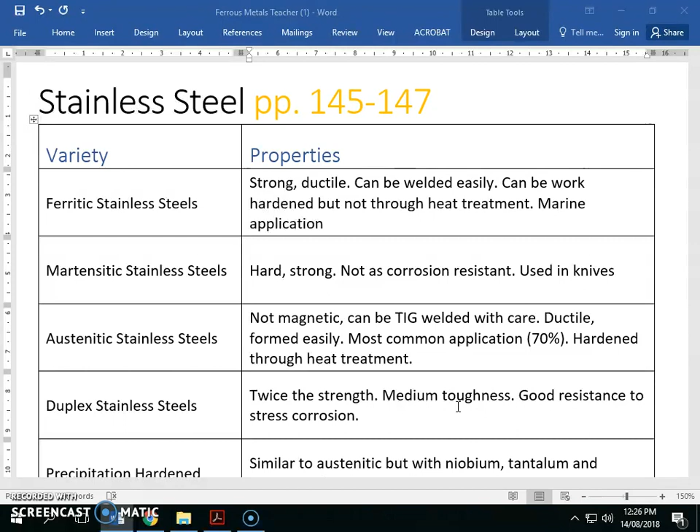These have martensite. We didn't talk about martensite above, but when we quench steel, we get acicular or needle-like grains. When we rapidly cool austenite, what we get is something called martensite. If you have to draw martensite, just draw a whole bunch of sticks. If you want to label it, you can say acicular, which means needle-like. What happens is it goes from being face-centered cubic to body-centered tetragonal. Now, the likelihood of needing to know that in the HSC is pretty low, but I'm going to put it out there anyway.

So we're going back to when we have martensite, martensitic stainless steel. It's hard, it's strong, it's not as corrosion resistant, but it's used in knives.

Austenitic stainless steels are not as magnetic, and can be TIG welded, but with care. Because otherwise, if it cools too rapidly, there's enough carbon in it for it to form martensite, and we don't like martensite unless we're going to temper it. It's ductile and formed easily, so it can be used in things like fridges. It's the most common application - 70% of all stainless steels are austenitic. They can be hardened through heat treatment, but I don't think they can be work hardened very well.

Duplex stainless steels have twice the strength. They have medium toughness, so they're between ferritic and austenitic, I think. Good resistance to stress corrosion is their big advantage.

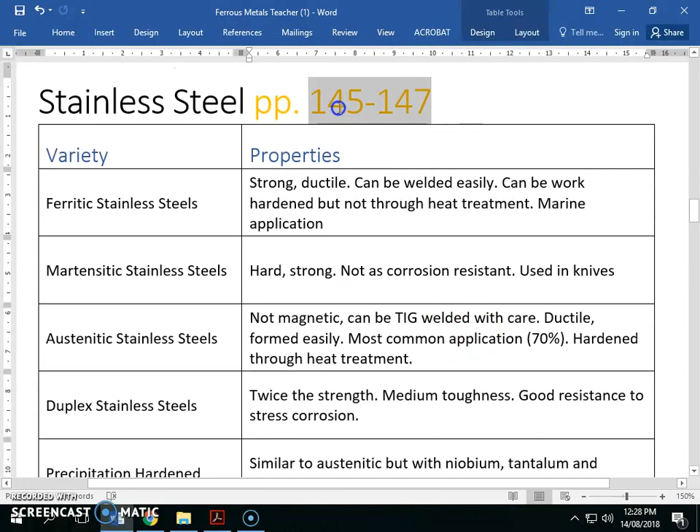All of these things you can find in the table in the 4th chapter of the book. I've jumped a chapter because I want to talk about all of the ferrous metals at the same time.

Precipitation hardening - some stainless steels can be precipitation hardened. This is a bit of a funny concept. Some aluminiums can also be hardened through precipitation hardening.

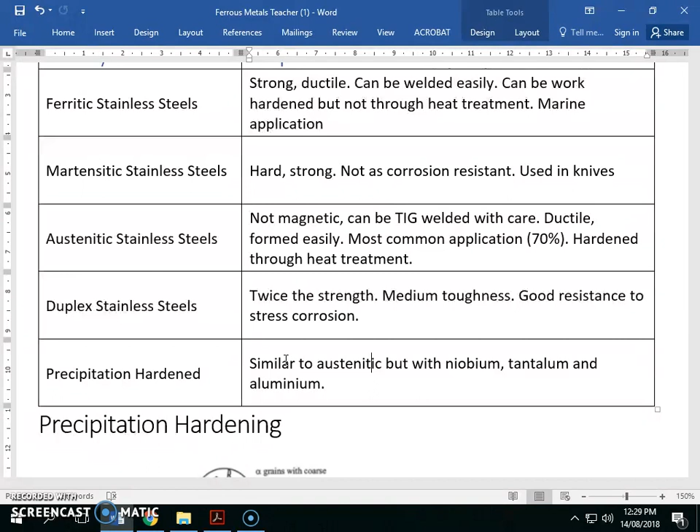I did not understand this concept until I started teaching it, and a friend of mine who used to live in Slovenia, who did his PhD in metallurgy, explained it to me. I said, where does the carbon come from? He said, well, do you know what case hardening is? It's the same thing, except the carbon is already inside the metal. It's already distributed through the whole thing - it's not being pushed in from the outside.

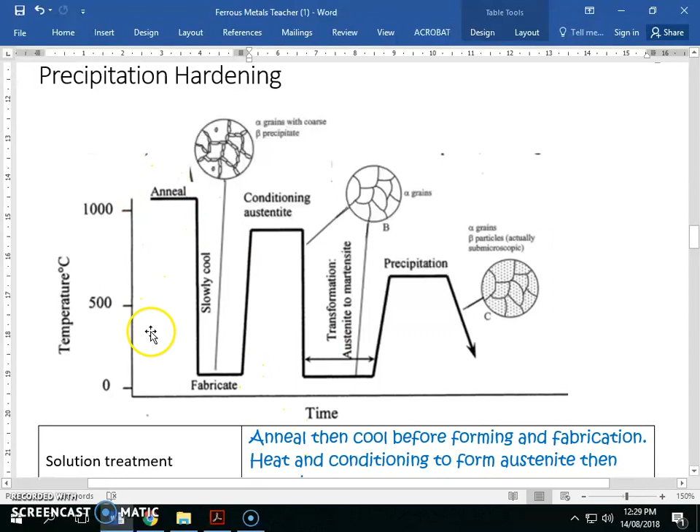Let's have a look at this graph here. Now you're going to complete some stuff. The first step you have to do is the solutions treatment. So the solution treatment is this part here and then there - that's the first step. Actually, the first step is these first two bumps, right there and there.

That's the solution treatment. First of all, you have to anneal. Then you cool before you form - that's fabrication, the forming. You're going to heat and condition to form austenite - you're going to form 100% austenite, and then you're going to quench.

What you're going to produce is two grains. Along the grain boundaries, and sometimes between grains, you're going to have a second different phase of material. It depends on what kind of material you're using, but this is pretty true of all precipitation hardening. I've combined this image using the aluminium one, but the idea is we're going to have different grain structures forming along the grains.

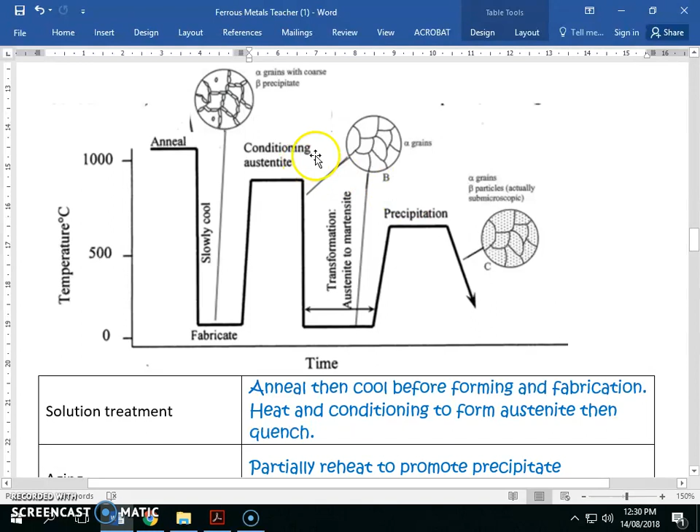That's not good. What we want to do is dissolve these little grains and integrate them evenly throughout the entire network, the entire grain. How I like to think of it is the second half of this process is that we are going to age - we're going to partially reheat, not to the same temperature. What we're going to do is allow precipitates to form evenly throughout the entire grain, and that strengthens the alloy.

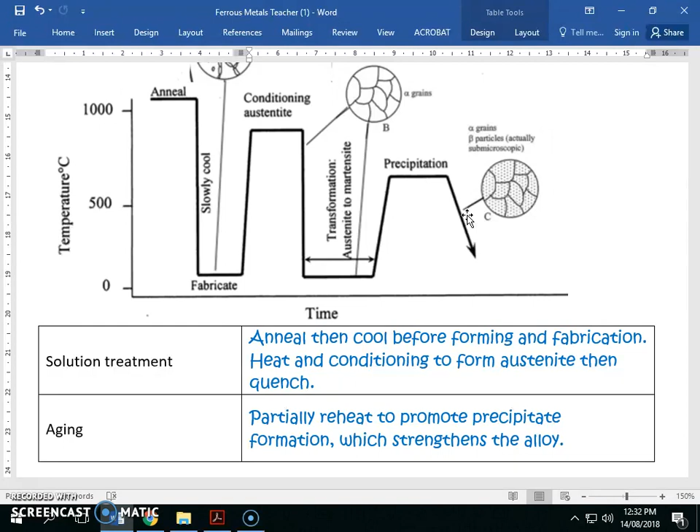The reason why that happens is we have these microscopic, or submicroscopic, precipitates. When we want to try and deform these grains, when we want to try and push dislocations, these little tiny microscopic beta precipitates are going to push back on that deformation. That's why we get that additional strength. Okay, so that's how precipitation hardening works. Okay, cast iron.

Cast iron is a ferrous metal containing between 2 and 4% carbon. What are its advantages? It's cheap. It casts well. It has vibration dampening.

Vibrations can shake a machine apart, but cast iron often has graphite, and the graphite can absorb those vibrations and dampen them, which can be good for things exposed to shock or that could shake themselves apart. They have very good compressive strength, but they're not so great in tensile strength.

That's a disadvantage. They can be easily machined. The graphite works well as a good lubricant, so if there's graphite present, it can provide good machining.

They're usually pretty hard, so they're usually wear resistant. They're usually pretty durable—well, what does durable mean if it's not hard? You know what, we're going to remove that. We're just going to leave hard.

Downsides: it's brittle. If you have cast iron and hit it with a hammer, you've got a better chance of it shattering than if you do with steel. They usually are not great in tension.

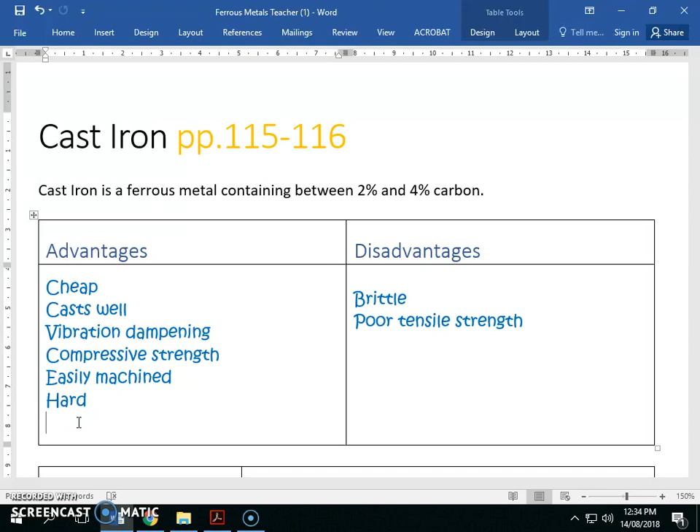Okay, let's look at some different elements we can add. Carbon: if carbon forms cementite, it's going to improve hardness. We've seen that as cementite goes up, we get hardness.

On the other hand, as graphite increases, we improve other properties. Graphite is a form of carbon—effectively pure carbon. Some cast irons have parts that are just pure carbon in the form of graphite. Graphite is good because it improves machinability and improves dampening.

Silicon: I think silicon also improves the flow, but it doesn't say that there. It makes graphite, which improves machinability and helps with dampening. I'm pretty sure silicon improves flow, but that may only be for cast aluminium.

Manganese improves toughness and strength. Sulfur reduces ductility, making it more brittle. Generally that's not a good thing, so we want to keep that percentage low.

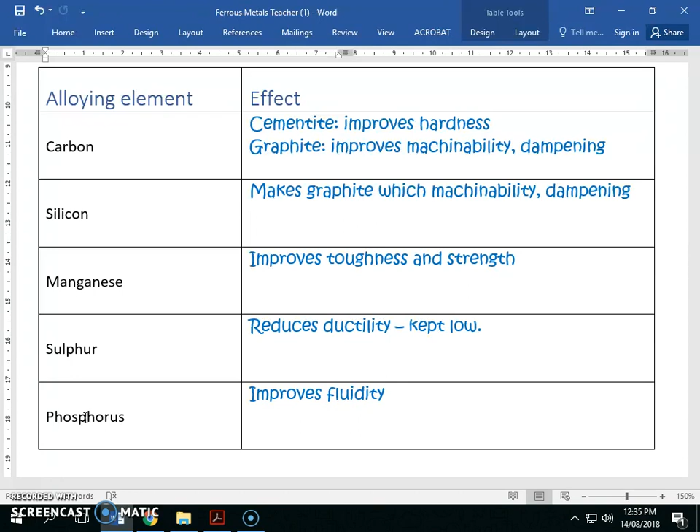Phosphorus improves fluidity. So if we want to cast something with very fine fins or fine detail, we might add phosphorus, which really improves the flow when we want to get into very fine, narrow areas.

There are three main types of cast iron: white cast iron, and two kinds of grey cast iron. White cast iron isn't so great, but we're going to use white cast iron later when we need malleable cast iron. So white cast iron is good when malleable cast iron is needed, used to make...

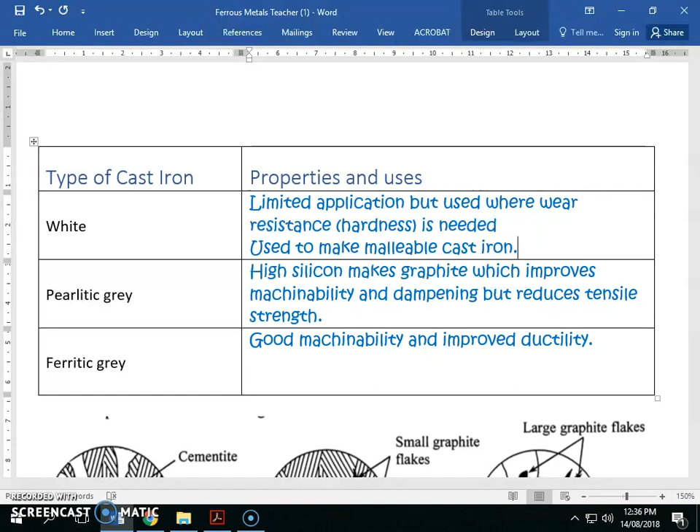Limited application means we don't use it very much, but it is used where wear resistance and hardness are needed, or to make malleable cast iron, which we'll learn about later. Pearlitic grey cast iron has a high silicon content, which makes graphite, which improves machinability and dampening, but reduces tensile strength.

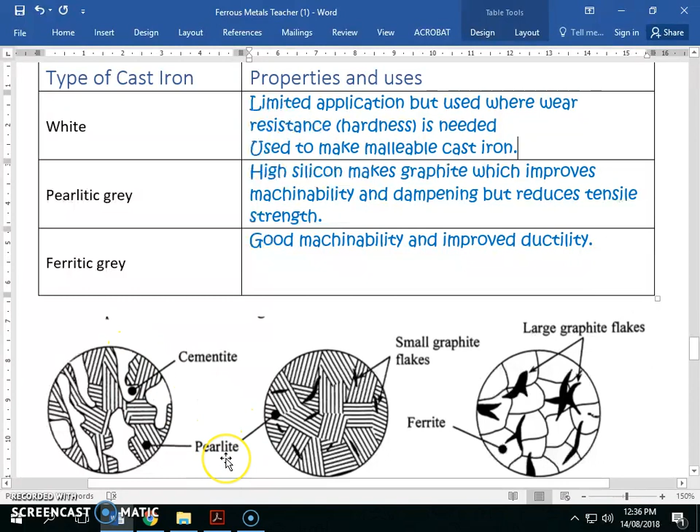So let's look at white cast iron. It's just like regular high carbon steel, where we've got an increasing amount of cementite. Now, we like a little bit of cementite—a little bit of cementite here gives us a hard, strong steel.

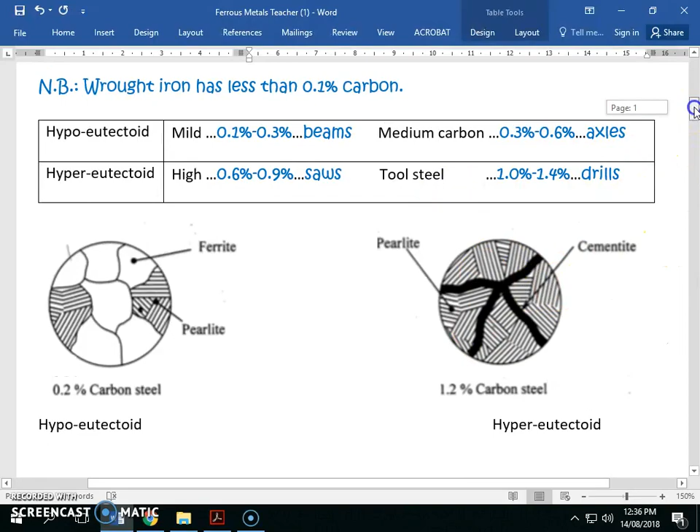But down here, we don't just have a little bit of cementite now—we have this huge chunk of cementite. And cementite is brittle.

On the other hand, if we add silicon, the silicon takes all of that cementite, takes away all of its carbon, and makes pure carbon. All of that high carbon cementite loses all of its carbon, and instead we just have chunks of pure carbon called graphite.

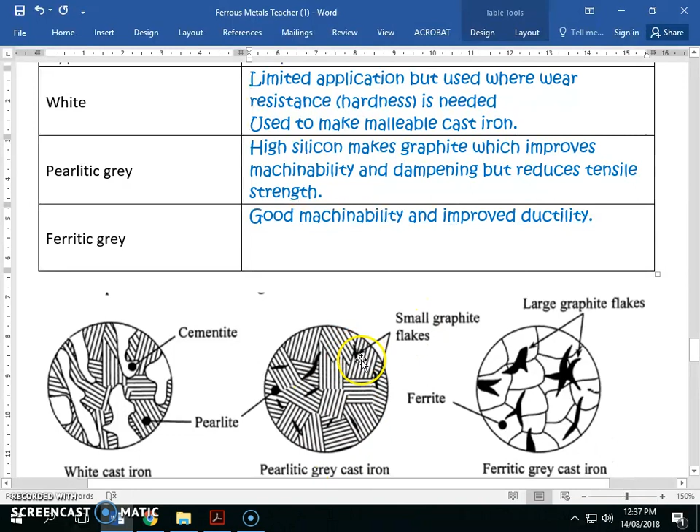Now in this case here, pearlitic grey cast iron, it only has small flakes of graphite, and the rest of it is pearlite. But we can take out so much carbon that we don't even get pearlite anymore. We've gone all the way down to ferrite. We've taken out so much carbon that we're back down into the ferrite range.

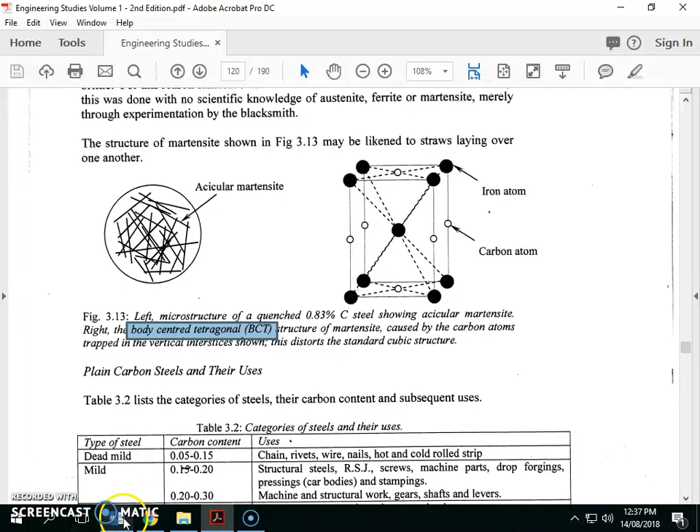I really want to make that point. That does not say cementite, that says ferrite. We've got ferrite grains now with massive, large graphite flakes. Does that make sense?

Now, ferrite we know is ductile. Ferrite means it's good for machining. So let's see. Ferritic grey cast iron has good machinability and good ductility. Does that make sense more or less?

If we have high carbon steel and we just keep going above 2%, we get this white cast iron. It's like super high carbon steel. But it's so brittle that it's not really used for much. We use it when we need something really hard.

What we can do is take out that carbon and just have pearlite and graphite. That's pretty good. We like pearlite, and graphite has some good properties. Graphite is good for vibration resistance or vibration dampening, and it's good for machining.

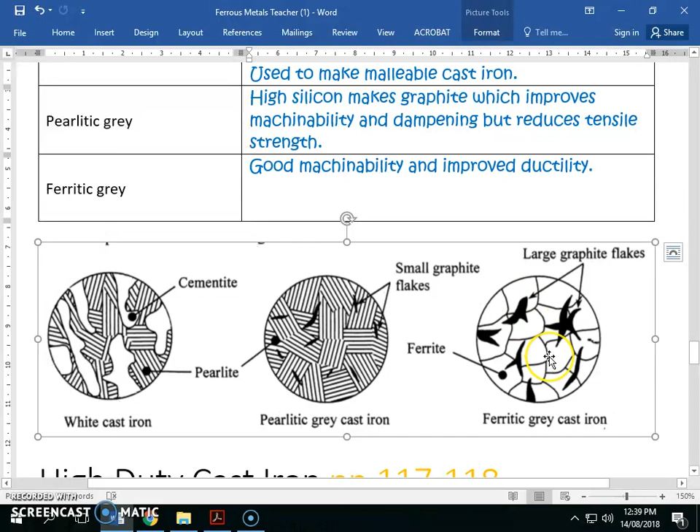We can even take out even more carbon, and we're no longer in the pearlite range now. We're back down into the ferrite range, and what we're going to get is flakes of graphite, which is really good for machining and really good if we need something that's ductile.

Now, high-duty cast iron. There are two main types, spheroidal and compacted graphite. What we add is magnesium. On our sheet you've got low silicon. Okay, you can change it to this. Okay, we're going to have a look.

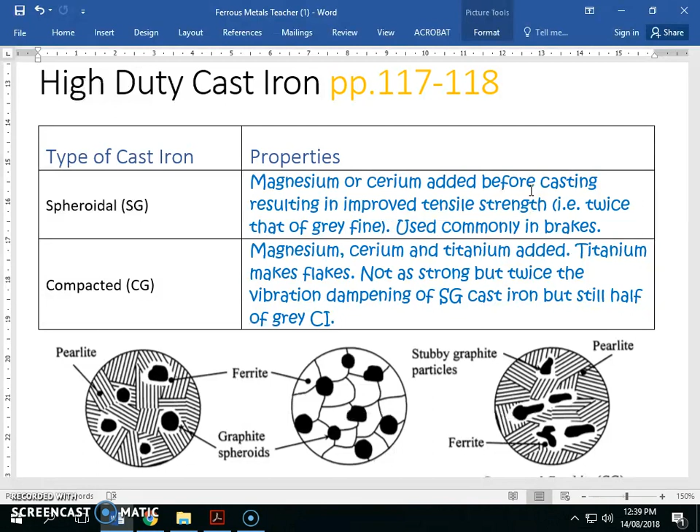Low silicon and high silicon. So we've got 3, you've got 2. I know, because these are both spheroidal, and I didn't want to break it down, so these are both spheroidal. This is low silicon spheroidal. Remember we said the more silicon we have, the more graphite. So if we only have a little bit of silicon, we still get pearlite. If we have lots of silicon, we take out so much carbon that we go all the way down to ferrite.

We add magnesium or cerium just before we cast, and it results in improved tensile strength. It's twice as strong as grey cast iron. It's commonly used in brakes.

On the other hand, compacted graphite, we add magnesium, cerium, and titanium. The titanium makes flakes. It's not as strong, but twice the vibration dampening as spheroidal graphite cast iron. But it's only half the vibration dampening of grey cast iron. So it's sort of in between having grey cast iron and spheroidal graphite.

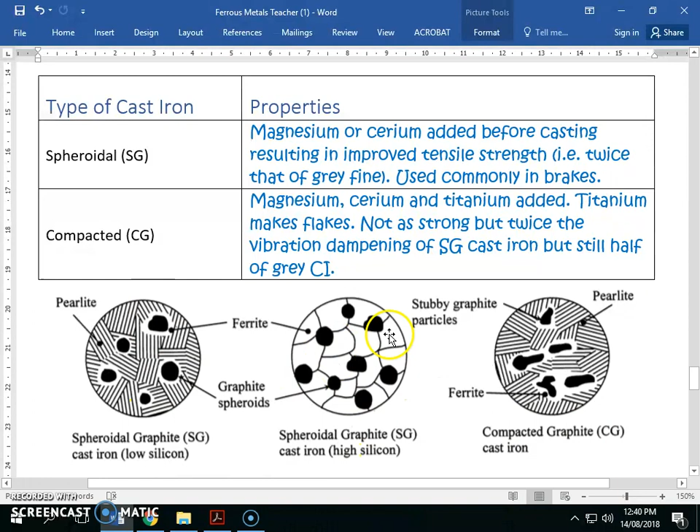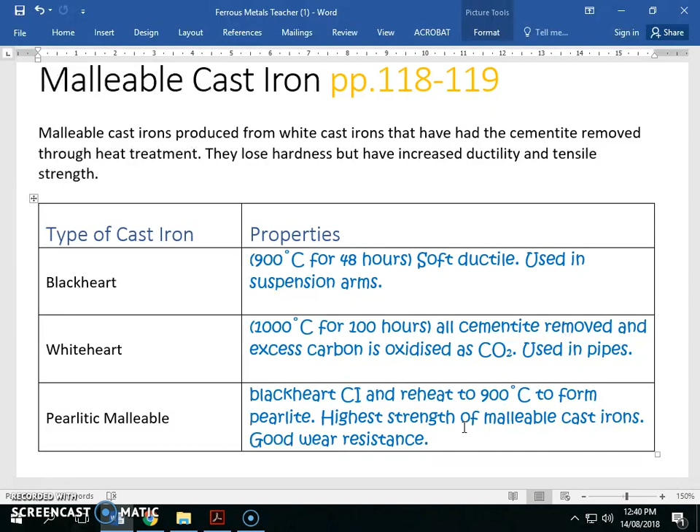Getting to the tail end now, we've got malleable cast iron. Malleable cast iron is produced from white cast iron. What we do is heat treat it and remove cementite. We can go black heart. How long do we heat it for? For 2 days. It's soft, it's ductile, it's used in suspension.

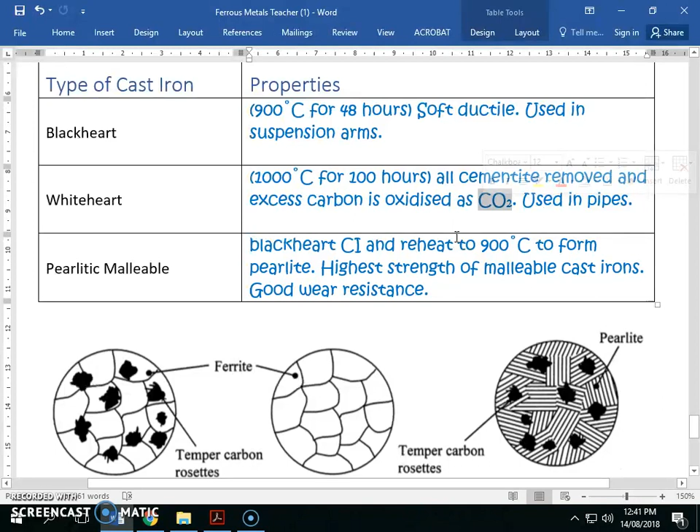We have white heart. How long do we heat it for? 100 hours, right, we heat it for 4 days. We heat it for so long that all the carbon, all of those graphite flakes, they form carbon dioxide and they just leave into the atmosphere. It doesn't evaporate, but it leaves into the atmosphere.

What do we use it for? Pipes, where we need a cast, but we still need it to be ductile.

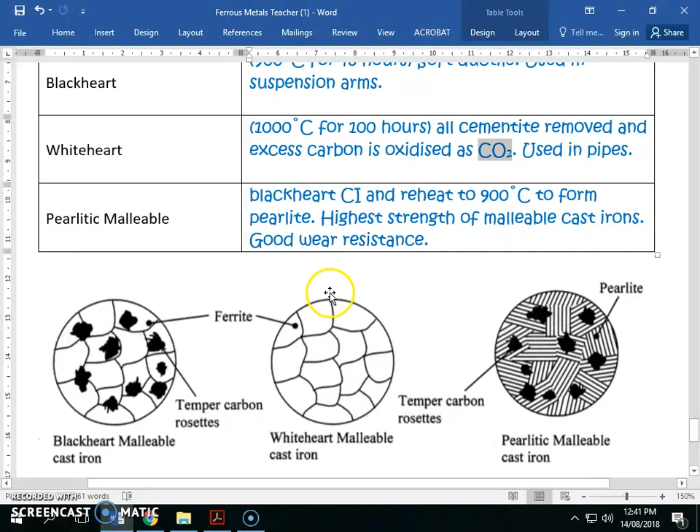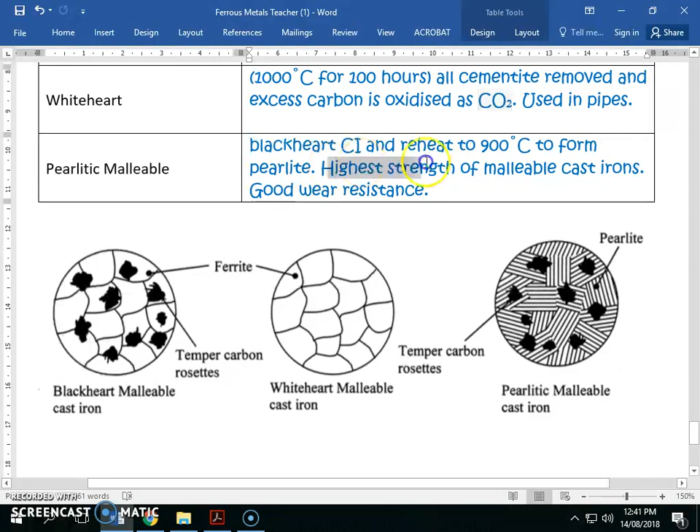Okay, the last one, pearlitic cast iron. What we do is make black heart cast iron. We reheat it again. This time the graphite forms pearlite. It has the highest strength and it has good wear resistance.